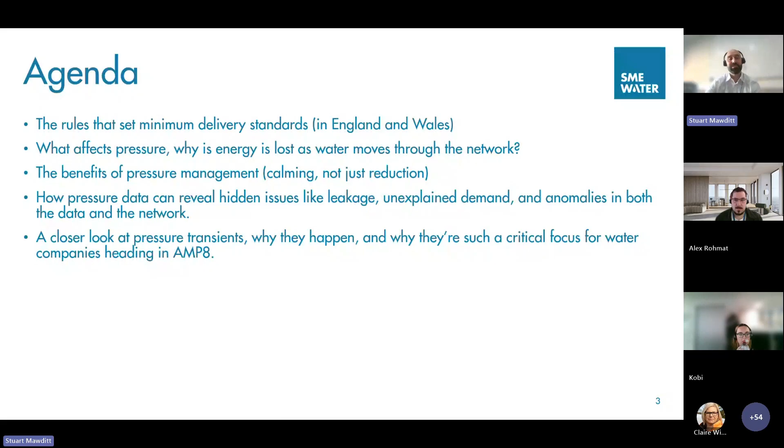I'm going to touch a little bit on how pressure data can reveal hidden issues like leakage, unexplained demand and anomalies in the data and network, and reflect on some work we've done in the past with Severn Trent, and something quite a few water companies do, using loggers throughout the network to look at things. I'll also touch on pressure transients, why they're such a critical thing to anticipate - it's an area that's increasingly important, and it's an area we as a business focus on more, and I know a lot of companies are looking at increasingly. So it's worth touching on and worth discussing.

So, starting off with what should we be doing as water companies and as an industry from a water pressure perspective? Ofwat have their guaranteed standard scheme, which sets out what water companies should do, and in that it says water companies must maintain a minimum pressure in the communication pipe of 7 meters static head. Part of the background behind that is the idea that that's the amount of pressure you would need to deliver water to a loft tank of a typical 2-story house.

There's no upper limit to this. Water companies can deliver as much pressure as they want to individual customers, but it's in the water company's interest to reduce pressure on the network, because reducing pressure will reduce the flow rate for leakage, and also is better for the pipe network, so reduces burst frequency. So water companies generally want to achieve as low pressure as possible, whilst maintaining what they need to from a customer perspective.

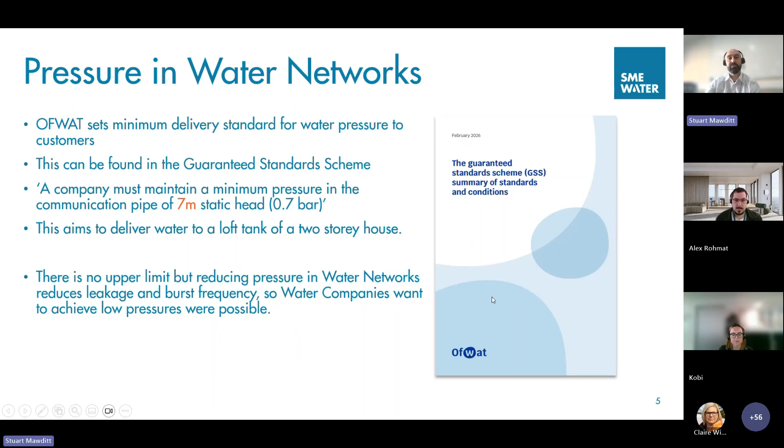Another consideration is long supply pipes and uphill supply pipes. A farm might be a good example. If you've got a valley and your water main is running through the middle of it, and then you've got long communication and supply pipes going off up the sides of the valley to farms, then giving a customer 7 meters at the end of their boundary might not be enough pressure to take that water up the hill to their farm.

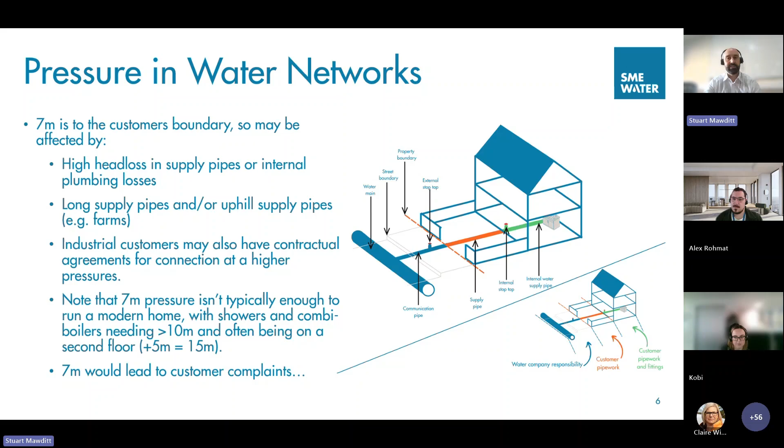So if as a water company you delivered 7 meters to a customer at their boundary, you'd probably get customer complaints because it wouldn't be enough to satisfy them. So water companies typically in the past have worked to a surrogate pressure of 15 meters in the water main. If we assume in this main pipe that's running through the network we've got 15 meters, that allows for any head loss on our communication pipe, guarantees 7 meters at the boundary, and also makes sure that customers are getting that extra bit they probably need.

Looking back at AMP6, we would often have seen companies targeting sort of 20 meters or 18 meters as their standard in the water main as a minimum. And that's because companies would have looked to have balanced low pressure targets as well as improving network performance.

Back in AMP6, companies had to report on where they weren't achieving that. As we've moved through changes to reporting and changes to targeting, that stopped being a standard measure for all water companies. Some water companies, as we move into AMP8, have still chosen that as one of their metrics, an optional metric that Ofwat can challenge them on. But quite a few water companies have dropped that, and it's no longer compliant, with a greater focus on CMEX, so customer satisfaction, rather than necessarily on individual pressures.

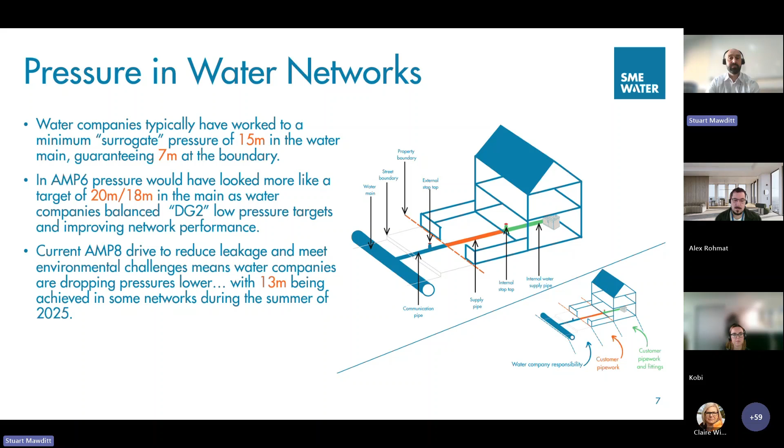Particularly over this past summer, we've seen water companies dropping pressures lower, down to 13 meters in some parts of the network. They haven't had a significant number of customer complaints, it seems to be working well, and we've seen those pressures sustained through the winter, starting to become a bit more of a norm. The key takeaway is that water companies are increasingly looking to find better margins of improvement, trying to get into areas we haven't been in before, and pressure's increasingly important for that.

Key numbers: 7 meters is the minimum pressure at the boundary, 15 meters in the water main is a common target, and below that there is a risk that customers might start to be affected, although water companies are pushing those boundaries a little bit.

Key considerations: water companies want to reduce pressure to deliver network improvements, particularly around areas like leakage, number of bursts on the water network, and interruptions to supply, which are all key metrics that are increasingly challenging through this AMP in terms of performance commitments. We're already starting to see water companies not necessarily meet all those performance commitments as they get harder through the year, and these benefits have to be balanced against CMEX.

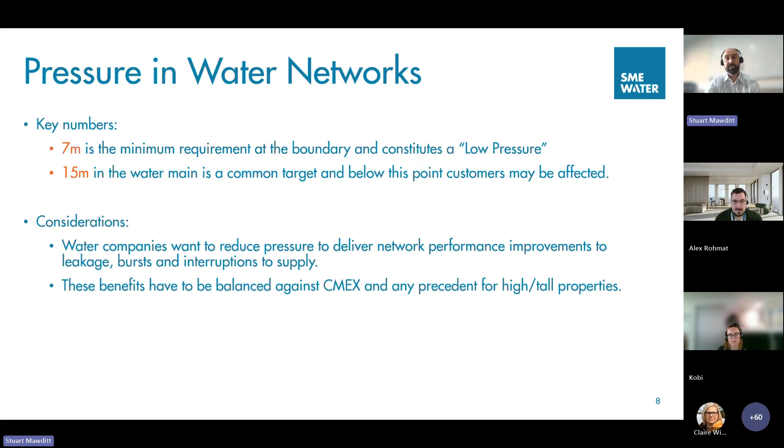Alongside these drives to improve operational performance, we've got to make sure customer satisfaction is high on the agenda, and also precedents that have been set around areas of the network we've delivered to, like high buildings we currently deliver water to, tall properties, tower blocks, etc. So there's a lot to balance across that.

What affects pressure on the water network? Water pressure typically occurs from two sources. The first and most obvious is that the source of water is at high level - we have lots of occasions in the UK where we have tanks on top of hills, supplying water down into the network, and that water carries the pressure with it. Or we might have pumps or booster stations at key points of the network putting more energy into the system for that water as it comes through.

As water moves through pipes, we lose energy through friction, particularly if we've got bends or partially open or closed valves - forcing its way through loses energy and pressure. Different pipe sizes and materials cause different energy loss. Generally larger pipes with a higher diameter and plastic pipes which are smoother cause less energy loss, whereas particularly smaller pipes and rougher pipes like older cast iron, which tends to have a rough inner surface, lose more energy as water tries to pass through.

The other key factor is that demand increase on a water network means we're pulling more water through the network, so we've got more friction on the inside, and we're losing more pressure - so pressure overall will go down. We often talk about, particularly in summer demand periods, struggling for pressure on the network.

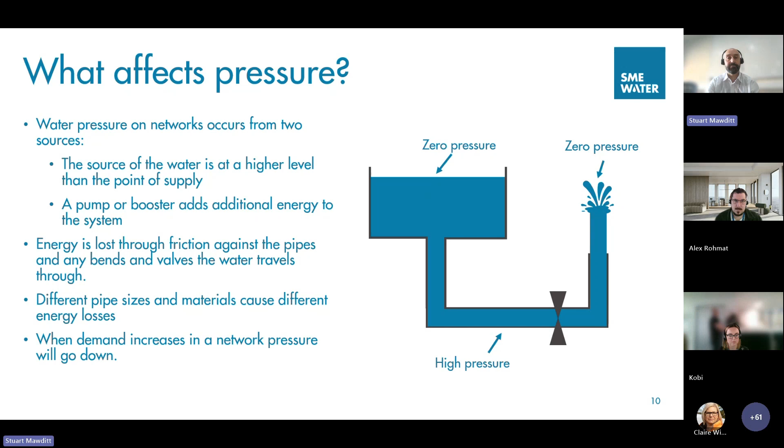A couple of key components in terms of understanding pressure: total head is effectively the weight of water acting above which creates pressure. If you imagine a lake, the total head is the elevation plus the pressure at a point in the system. We create 3 points on the network. At point A, the elevation is 100 meters, but there's no water pressure because we're on the surface of the lake - that gives us 0 water pressure and a total of 100 plus 0, which is 100.

As we go down below the surface, we start to get more pressure, but we've offset that with a reduction in elevation. At point B, an elevation of 75 meters gives a pressure of 25 meters. Then heading down towards the bottom of the lake, we've got 50 meters, which is the weight of the water above as pressure, at an elevation of 50 meters.

This is true for a static system. In the lake, we're not getting water moving through, so we can translate directly the elevation into pressure - a simplification. If we had a water pipe running down this hill, we can use exactly the same assumptions to calculate the pressure at any given point in the pipe, as long as the water isn't moving - as long as it's static, we haven't got any friction losses due to water moving through the pipes, or any other losses at all. We can assume the pressure is related to the elevation in the pipe.

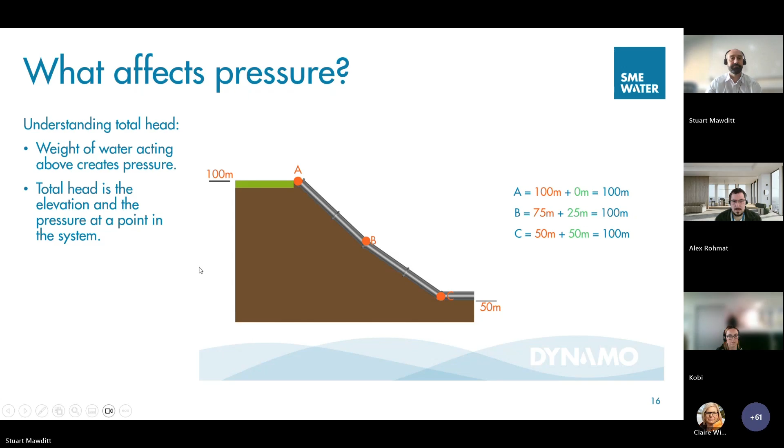Okay, so understanding head loss. The key component that causes head loss, the loss of total head in the network, is friction. As water moves through pipes, the water rubs up against the edge of the pipe, which creates friction and energy losses.

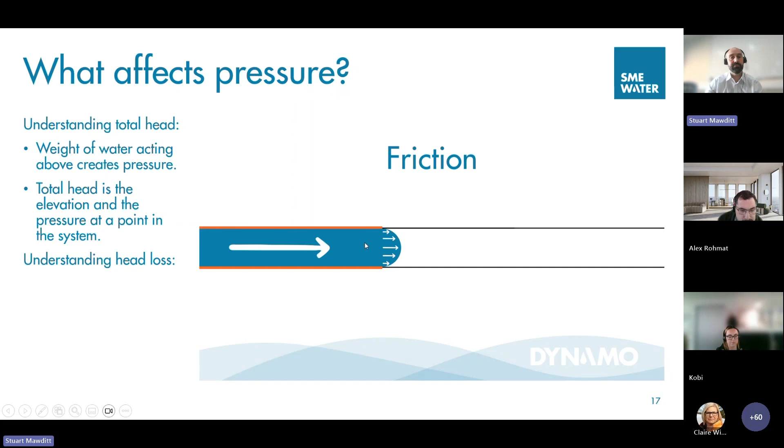One of the key equations we use to understand this is the Darcy-Weisbach equation, and breaking this down allows us to understand the key components that affect friction losses in pipes. The L on the top of that equation represents the pipe length. You can imagine if we're losing a bit of energy over a short pipe length, if we double the length of that pipe or triple it, we're going to lose twice as much energy, or 3 times as much.

Moving on through the equation, we divide it by the diameter. Narrower pipes will have more friction. If you imagine a small diameter pipe, the ratio of the surface area for water to flow through, related to the surface area touching the outside of the pipe, is quite small. As we increase that, we get a much bigger ratio in terms of the volume of water that can pass through without touching the edge. So the relationship of those friction losses drops. Bigger pipes, less friction losses; smaller pipes, bigger friction losses.

Faster flows cause a big increase. Obviously if the water's moving faster through that pipe, we get much higher friction losses. And that's a square relationship - that means as we increase the flow through a pipe, represented by the velocity there, we see a square relationship. So putting twice as much water through a pipe will create 4 times the amount of head loss, with 4 times being the square of 2, as we're trying to force more through.

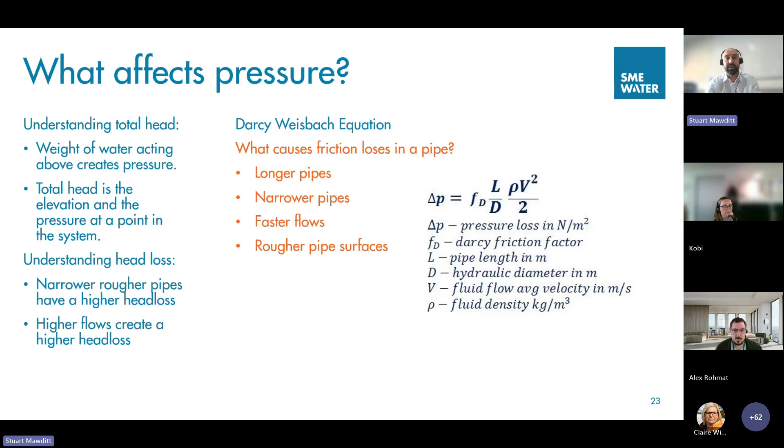So those things all contribute to us getting a higher head loss in a pipe. One of the key takeaways when looking at water networks is that bigger plastic pipes have fairly negligible levels of friction losses compared to older cast iron networks. So narrower, rougher pipes have a higher head loss, and higher flows create a higher head loss.

The other area is looking at turbulence in pipes. On the left-hand side, we've got what we'd call laminar flow within a pipe, where water moves in nice smooth layers and isn't interacting with itself. As we come across parts in the pipe causing restrictions, the water has to go through that restriction, which causes friction losses, but it can also create turbulence within the network, meaning we lose energy as the water effectively bumps into itself as it moves around.

That turbulence can be caused by corners in the network, where the pipework is going around a bend or a corner, or where we've got other tighter bends in the network, or where we've got partially open or closed valves, etc. within the network. That can have quite a significant impact.

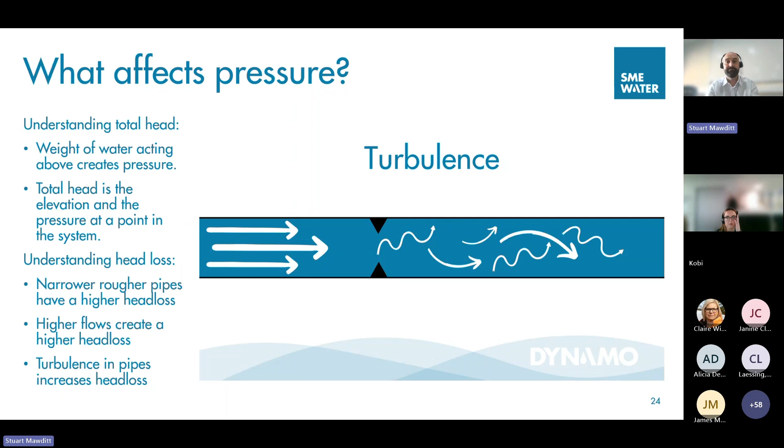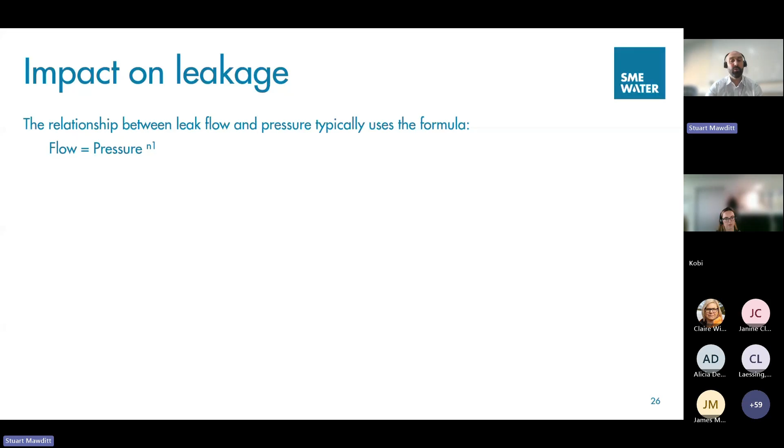Moving on to talk about benefits of pressure management, on time. The relationship between leak flow and pressure typically uses the formula flow equals pressure to the power N1. So as we increase pressure in the network, the flow coming out of leaks will increase, and we use an N1 relationship. I'll talk a bit more about that N1 relationship.

And that N1 relationship depends on a number of factors. What I'm talking about here is a burst on a pipe, and that burst can have a number of different failures.

It could be circumferential, it could be longitudinal, it could be corrosion, so it could be a hole in a cast iron pipe, it could be a joint, and with those joints they might open up as we increase the pressure. So depending on the type of failure, it can affect the relationship between flow and pressure.

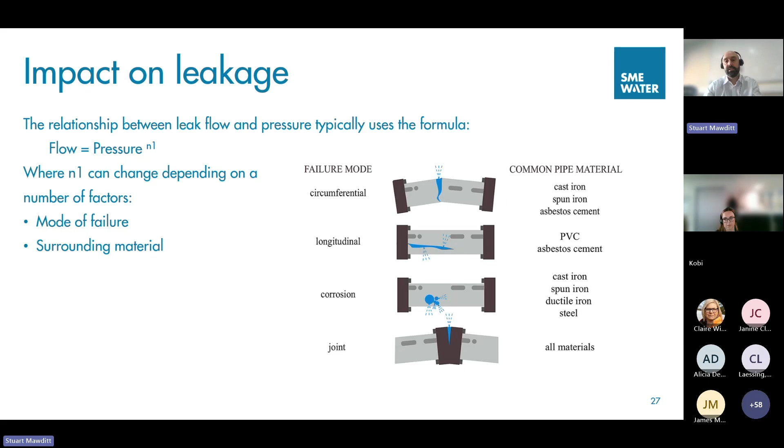We've also got the surrounding material to consider. Where we've got the burst on the network, it can start to erode the surrounding material around the pipe, and that might cause the pipe to fail more and open up more. It might also mean that it's not then restricting flow that's coming out of the pipe.

N1 uses a fixed orifice equation. In this example, we're saying that there's a hole in the pipe and that pipe doesn't change. This is an experiment I remember doing as an undergraduate at university. The idea is that you fill a reservoir with water, you've got several holes, and these are all fixed orifice holes, so the size of the hole doesn't change as you do the experiment.

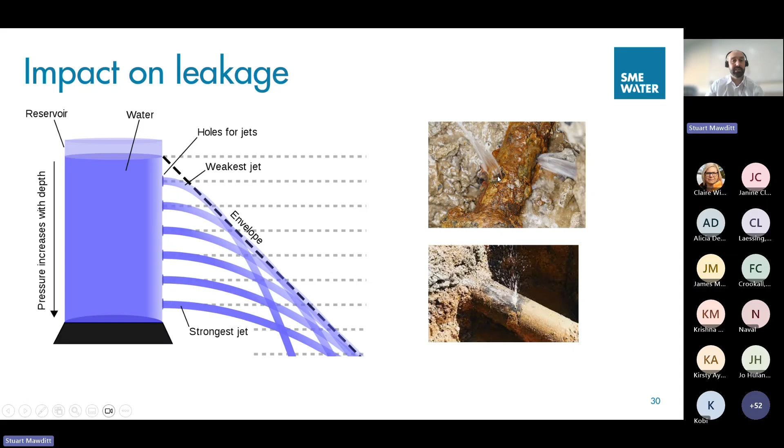This relationship is proportionate to the pressure to the power 0.5, so we're getting diminishing returns in terms of the pressure for the length of the jet. This is consistent with cast iron failure, where we get a hole appearing in the cast iron. You can see in these cases there's a hole, and that hole doesn't change in size depending on what you're doing. So a cast iron spot failure typically follows this line, and we're not seeing a proportional representation in terms of the change of pressure and flow.

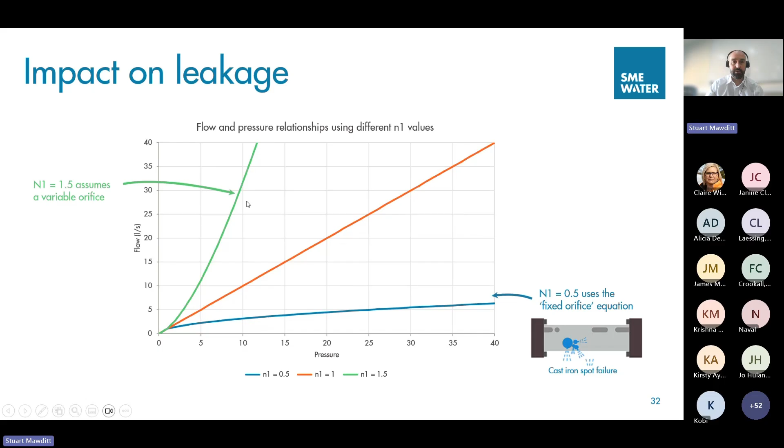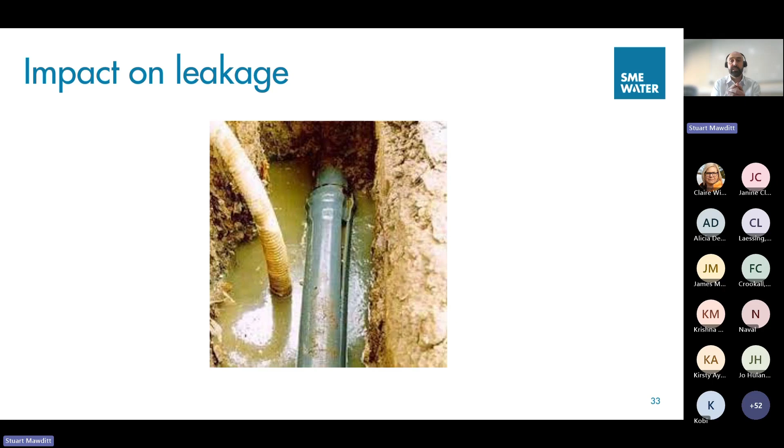An N1 of 1.5 assumes a variable orifice, so this is the opposite. You can see a plastic split in a pipe that's been excavated. Now you can imagine that split opens up, and as the pressure increases in the pipe, that split probably opens up a little bit more and a little bit more, which allows more water to escape. So that's giving us a variable relationship. A good example of that would be a plastic longitudinal failure.

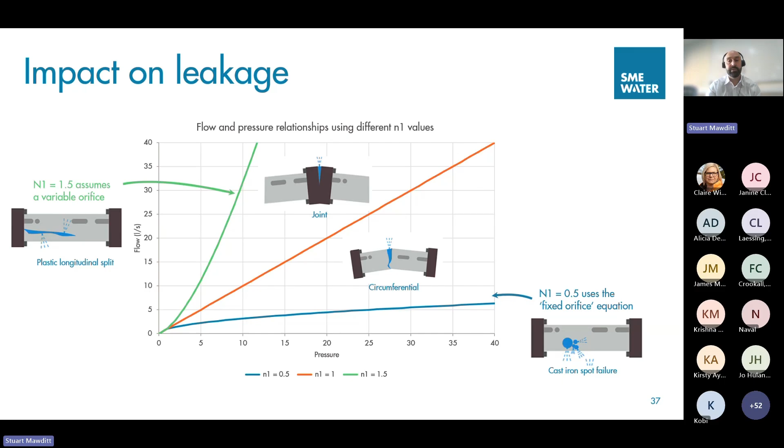Now there are other types of pipe failure that sit in between, so there might be joint failures or circumferential failures, which are maybe allowed to open up a little bit, but are then more restricted. What we often find is that on water networks, we get a mix of relationships depending on the type of network. We might have a network that's predominantly cast iron, or predominantly plastic. But these relationships allow us to calculate the benefit that we would get from reducing pressure on a network.

What we often do is try and split bursts down - this is getting a bit complicated - into non-pressure dependent bursts and pressure dependent bursts. So the idea is that we've got a block of bursts at the bottom of the graph, where we're saying regardless of what we do with pressure, that pipe's always going to fail to some extent.

And that might be because of ground movement. Particularly, we've seen a lot in the past 5 years of very dry summers, so we might see ground shrinking. We then get very wet winters, so we're seeing ground expanding. Depending on the soil type, you're then seeing different types of relationships in pipes. So we often talk about a non-pressure dependent component that sits at the bottom of the graph, and then we've got this power law that gives us this relationship, typically using a value of 3 to represent that power law.

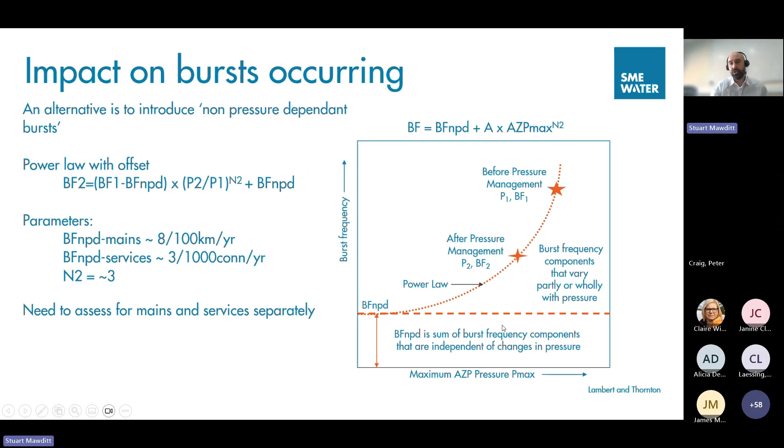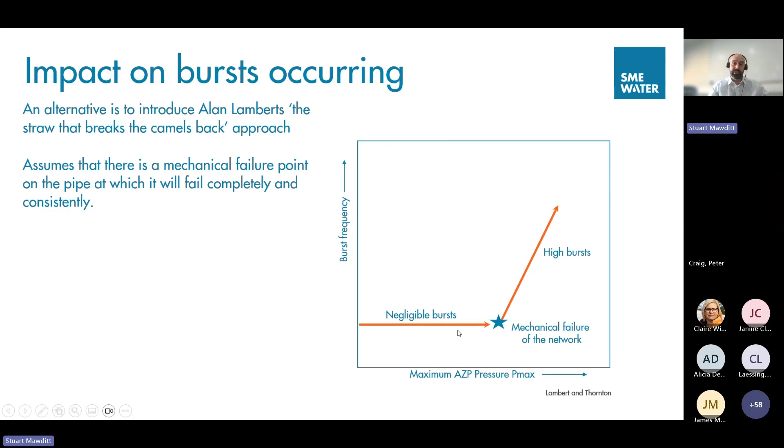This assumes that there's a mechanical failure point in the network. We've got a curve here that shows a cube relationship, but you could also say there's just a point at which it fails. So there's a point at which you get negligible bursts, representative of non-pressure dependent behavior, and then you get failure.

There are lots of things that affect the network once it's been laid - things like soil corrosion of the pipes, so cast iron pipes laid in clay will often corrode quite viciously. You get traffic loading on networks, so if pipes are laid under roads there's movement. You might also have pressure transients happening on the network, from customers operating and closing valves, or water network pumps damaging the network as they pass through.

These external factors bring the actual strength of the pipe down to a certain point. If we can bring the pressure down below that point on the network, we're achieving a level below where mechanical failure occurs. So there's a suggestion that rather than continuing to get benefits from pressure reduction, we actually reach a point of diminishing returns.

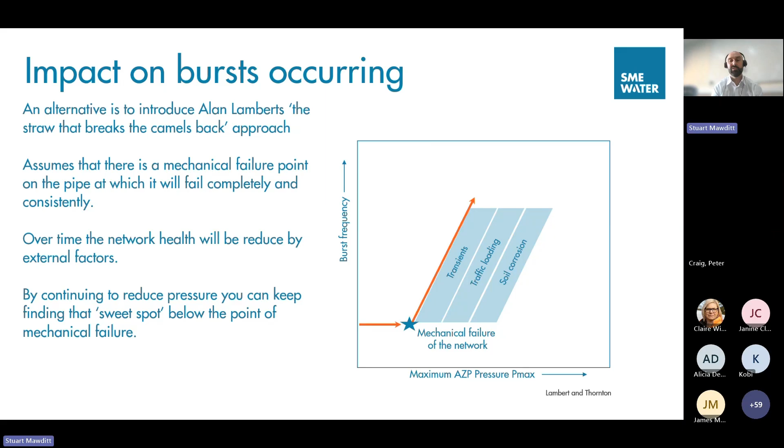That's quite interesting when we start talking about those lower ends of the pressure scale. So once we're below 20 meters and water companies are trying to balance that, do we keep reducing pressure? Where can we see benefits compared to making sure we're getting good customer satisfaction levels and not impacting on customers' homes?

One of the other things talked about in the industry is understanding whether networks, once you've reduced the pressure, relax and become accustomed to that pressure - a lot of people talk about the idea that over time, the level of bursts builds back up.

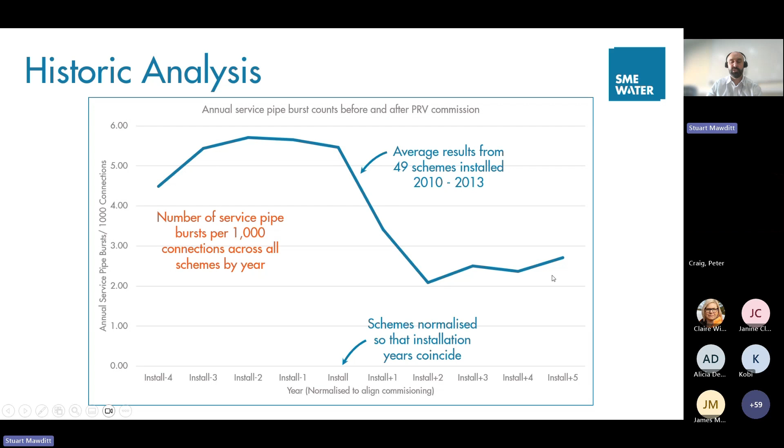So here are some examples of pressure reducing valves that were installed and commissioned - about 49 schemes installed between 2010 and 2013. Normalizing that, you can see a significant impact. This is looking at annual service pipe bursts per 1,000 connections in those areas. You can see you're typically getting 5 service pipe bursts per 1,000 connections in the years before, dropping down to around 2.5 - so you're halving the number of service pipe bursts happening on the network.

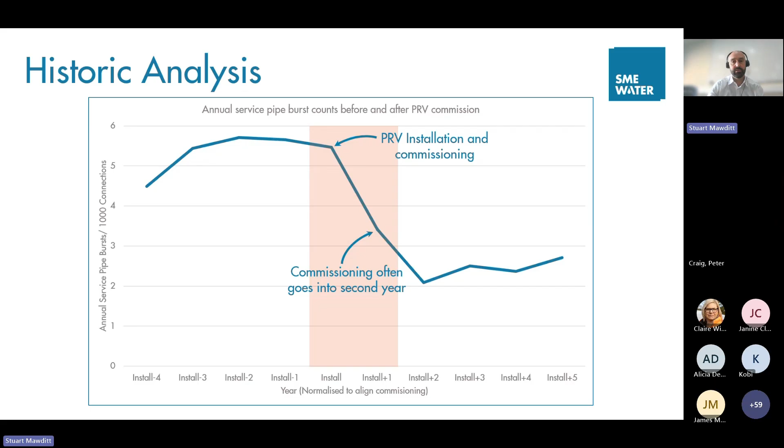So that's looking at PRV installation. Commissioning might come into the second year, so it might take a couple of years to get the system working effectively - 5.3 bursts before, and then 2.5 bursts afterwards.

Just looking at the 2010 schemes, we did a bit of analysis over the next 7 years, and you can see in that example you've got a sustained burst reduction benefit. From the analysis we've done, we haven't seen the network start to creep up to previous burst levels if that pressure is sustained - but there are certainly other people in the industry who think it does. So there might be questions around what benefits you're going to get from pressure reduction and whether that's sustained over a longer period.

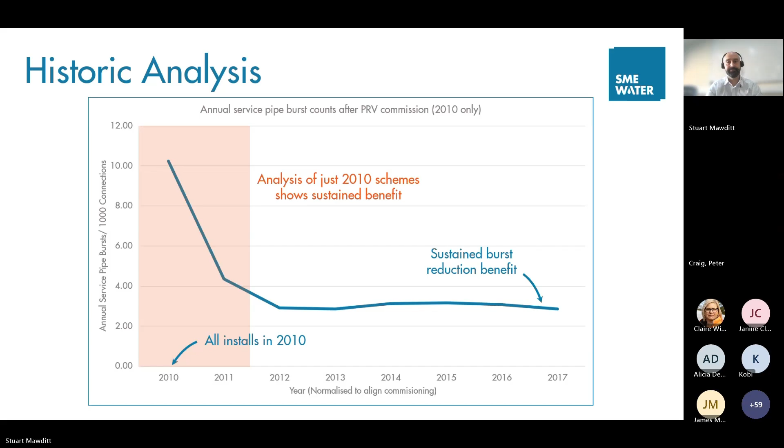Okay, going on to talk a little bit about using pressure data within water networks - how do we identify opportunities to optimize pressure on our networks? I'm going to talk about installing pressure reducing valves and how that allows us to reduce pressure, and property pressure analysis, which is one of the tools we use as part of that. I'll also talk about dynamic pressure modeling, which is effectively using pressure sensors on the water network and looking at the relationships between them to understand what's happening.

Pressure reducing valves allow water companies to manage the pressure on their networks. If we've got an area that's high pressure, we can put a valve on the network, and a pressure reducing valve can either give us a nice steady sustained pressure on the outlet, so we drop by a fixed amount and sustain the level, or we can do complex controls, so at night time we reduce the pressure further, but in the daytime when people start taking water from the network and need more pressure, we increase it as the flow increases.

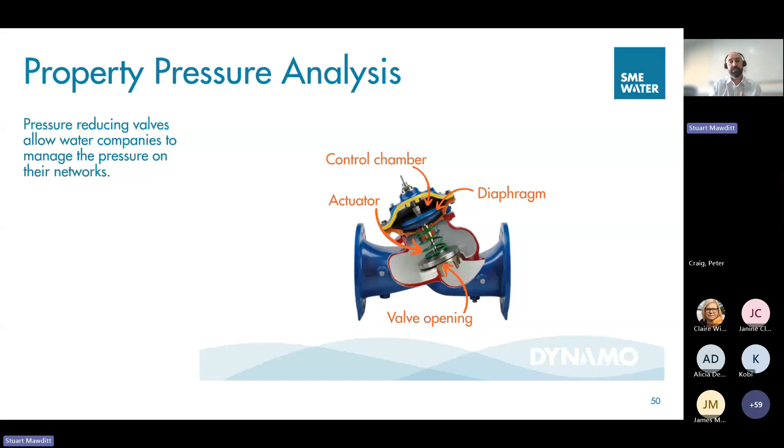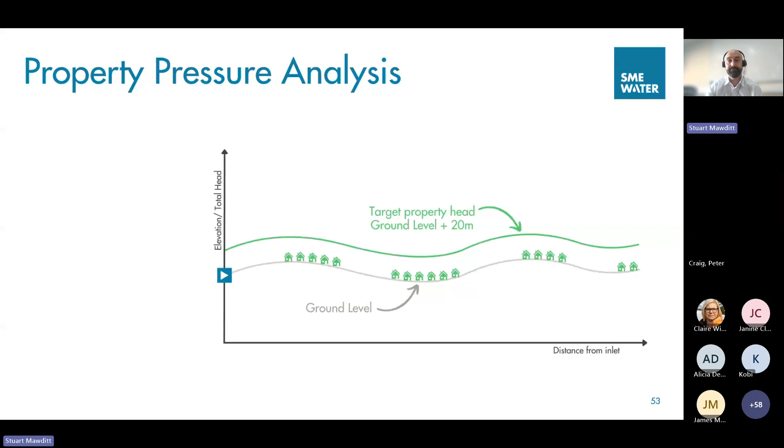We talked earlier about our total head. We've got our total head line, which represents the pressure plus the elevation in that DMA, and we can see that's decreasing as we go through the area. So as we're moving through the water network, we're losing energy and losing that total head.

We can then simulate the impact of installing a PRV. We've dropped the pressure down, put a valve on the network, and that effectively just drops it down as a straight line. So we've got a parallel line which shows the reduced pressure going there.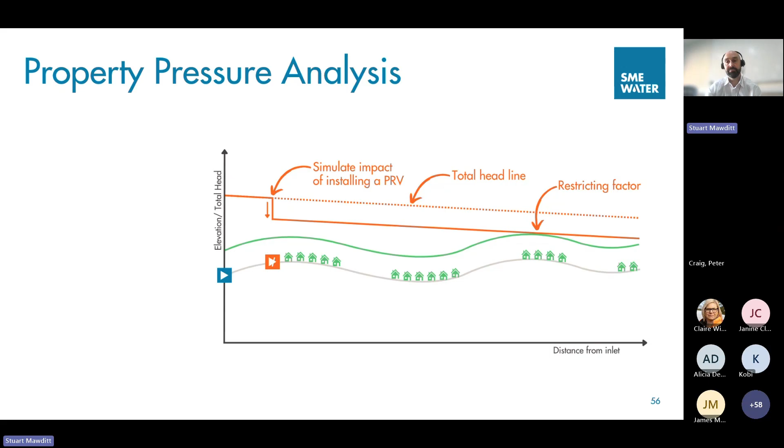That then comes down to a point in the network which is our restricting factor. In most domestic water networks, we'll have a restricting factor, which is the high point in the area where we've got very high head losses. So where that line's really steep, it might be a far point in the network, but we can pick up where we've got those restrictions.

What we can also consider is different scenarios. So in this case, that might be our peak flow, representing the amount of head loss we're getting in the network on a morning when everyone's up, having their showers, getting ready for work.

We might have a minimum flow scenario. We talked earlier about the head losses in the network and identified that at lower flows, we're seeing less head loss, so you can see that's a much shallower profile.

Adding that modulation, which allows the PRV to change its outlet pressure at different times of the day, then we can achieve a reduction at minimum flow.

When we look at that from an overall benefit, you can see we've got optimization at that point. It comes from a reduction, which from the formulas we looked at earlier, means we get a reduction in pressure, a reduction in flow and leaks, and a reduction in burst rates as well.

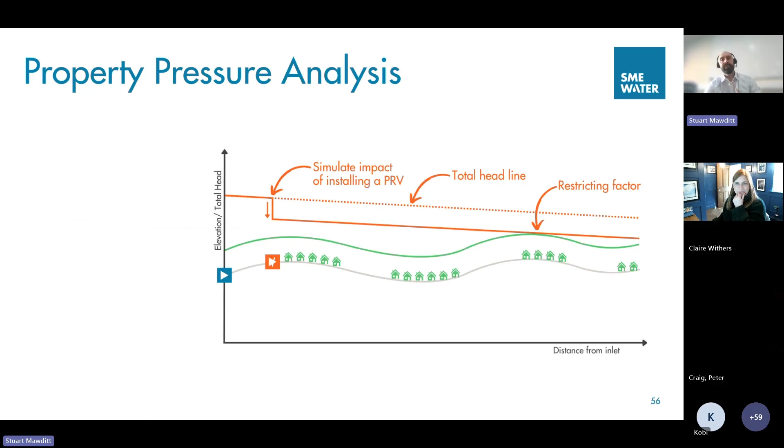So we simulate the impact of installing the PRV. That's a minimum flow scenario, so we've got less flow on the network, so we've got less head loss, so we've got a slightly shallower line in terms of what's happening.

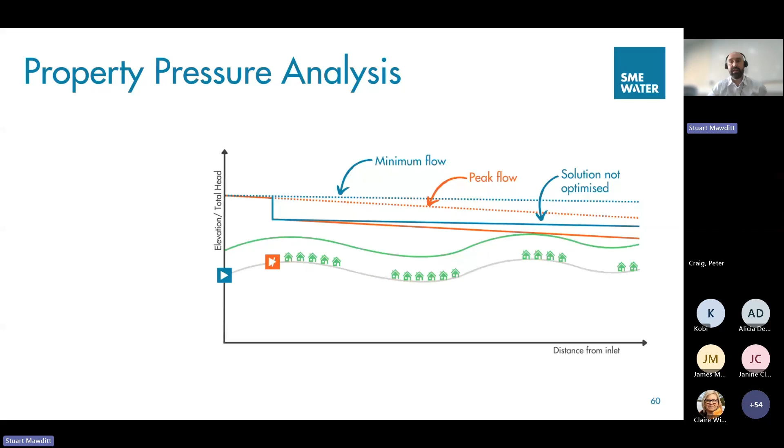When we take that from our PRV, we can show that at night time we'd have excess pressure. So those properties, where it might be optimized during the day, it's not as optimized at night. Now the control we have on pressure reducing valves allows us to modulate that valve and give greater reduction at minimum flow, so we can squeeze the pressure down a bit more at night time.

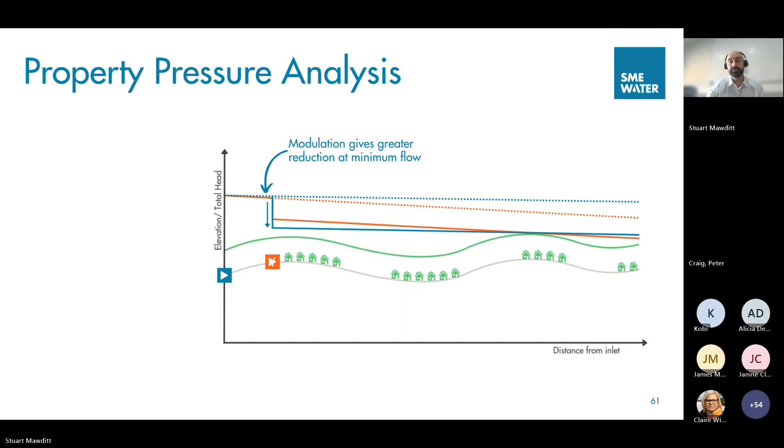Let me just stop sharing for a second. I shall just try plugging into a different network and see whether that improves. My camera might go a bit odd, you might see me on our meeting room screen for a second, but I'll switch back. Is that any better? Let's go with that, and then I'll do a hand signal on the screen if it cuts out. I might not see you if I'm sharing, but we shall persevere. Thank you. I shall just have to reshare, 2 seconds. Sorry, my computer's just still reacting to me plugging in.

Okay, right, I shall persevere. Apologies if it's breaking down a little bit. Right, so we've got another sort of 5-10 minutes left. Right, so I'll move on from this bit.

The key takeaway is that we're getting network calming, so reduced pressure. There was a bit of an anecdote that I don't know whether you caught, that customers tend to prefer calmer pressure. A lot of customer complaints normally stem from variations rather than sustained low levels of pressure. So if you can get customers to a good level of pressure and keep it at that point, they tend to be happier overall.

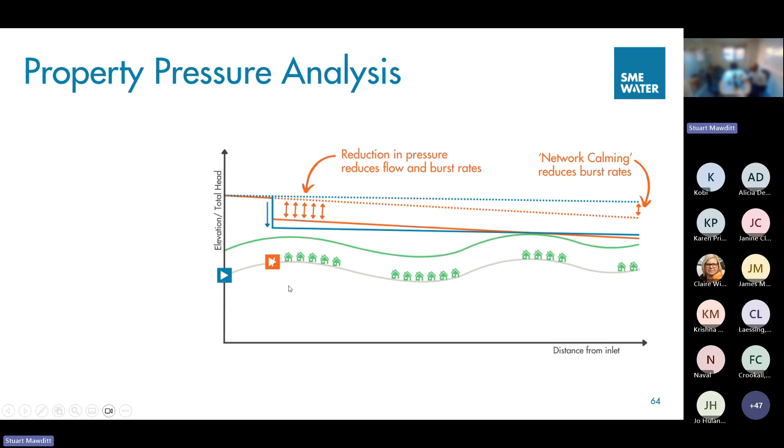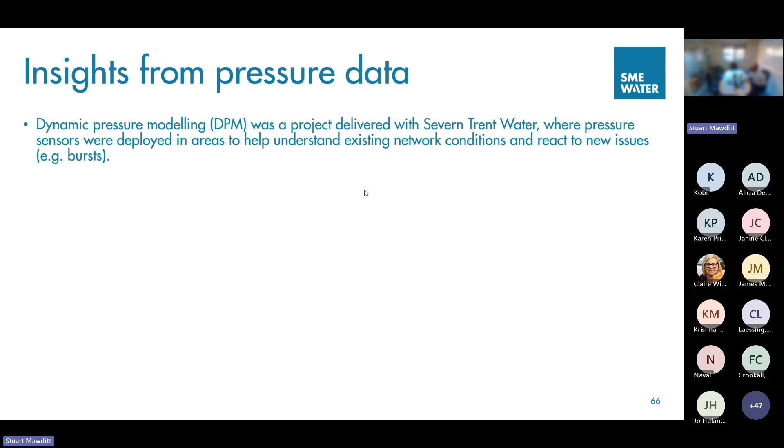Okay, so moving on to some additional insights. I'm going to talk about a project called Dynamic Pressure Modeling we did with Severn Trent, where pressure sensors are deployed in areas to help understand existing network conditions and react to bursts on the network.

So in this case, we've got a district metered area. District metered areas are used by water companies on their clean water network to create a subsection of the area. What we typically do is monitor the flow going into an area, close all the valves around the outside, and that allows us to understand what's going in. We can subtract how much demand is being used by customers, etc., and that allows us to say whatever's left, in theory, should be leakage. If that changes, we know we've got bursts on the network and can respond to it, with a fixed area that we're responding to.

And that works because of the head loss on the network. So when a burst occurs, that increases the flow. We then see an increase in friction losses through the pipes, so we see a drop in pressure in that area predominantly compared to the others. So we're able to pick that up.

This is something that is increasingly being used by water companies. We see some companies, Anglian Water, Affinity, have installed increasing numbers of pressure loggers on their water networks. Some people are doing more complicated things around hydraulic modeling, actually building detailed models that simulate the head loss in the network more effectively. Other companies are doing simpler things, just looking at the difference in pressure without getting into too much hydraulic detail. So it's quite useful.

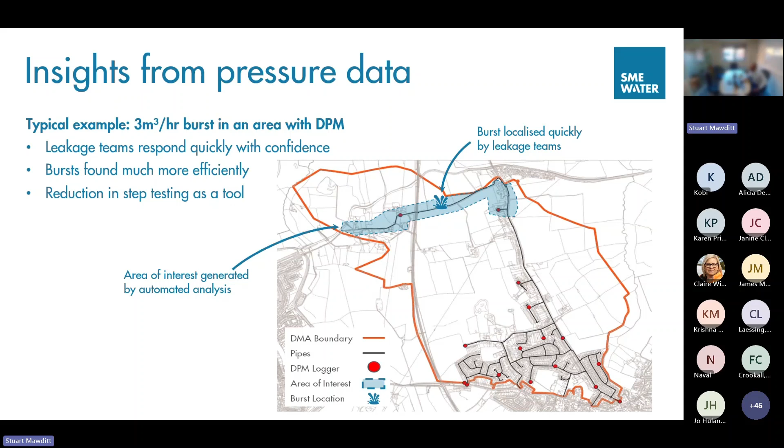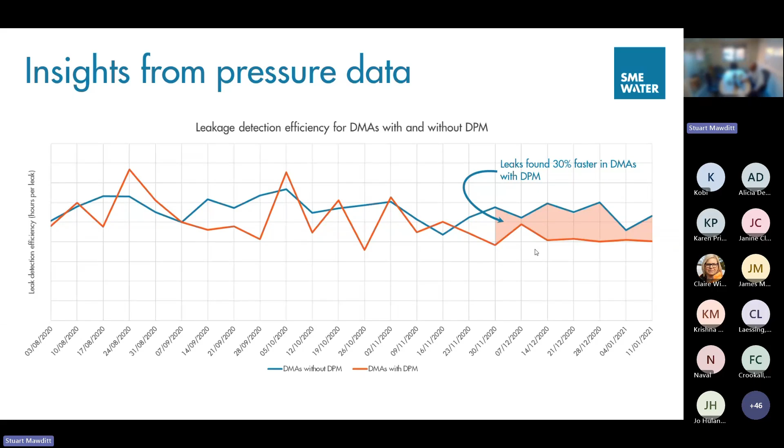This is showing some of the results from Severn Trent, and they found that leaks were found 30% faster in areas with dynamic pressure modelling, so quite a good result. Looking at leak detection efficiency over a longer period of time, 50% more leaks were found in DMAs with that solution in place than areas without.

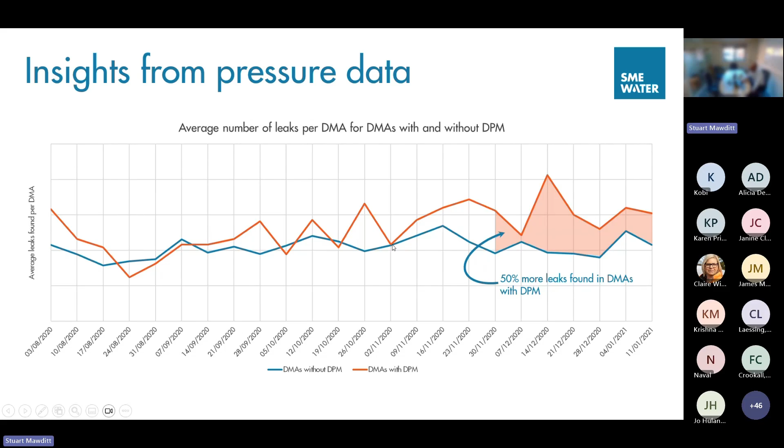So it can be quite effective, but it needs to be deployed in the right area. It's not formed part of Severn Trent's long-standing process. I think with all solutions, you've got to look at the overall cost benefit and the challenges of deploying pressure loggers on the network, maintaining them long-term means that there might be more cost-effective solutions out there.

It can be quite effective for doing things that are non-leakage, particularly identifying where you've got boundary valves open with adjacent areas. Pressure can tell you where you've got inline valves, so you've got part where you've got valves in the network which are closed, causing restrictions. It might also highlight where you've got problems with your GIS.

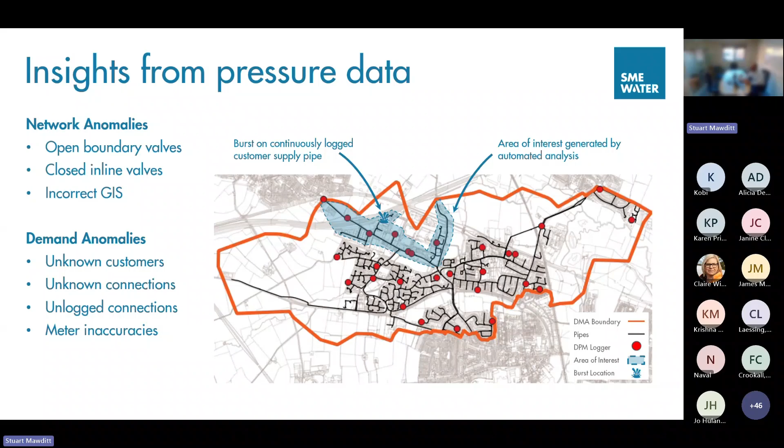It's quite good for identifying demand anomalies, picking up where you've got unknown customers on your network or unknown connections, because it's effectively telling you what's happening, which you'd be limited from if you were just surveying your known network.

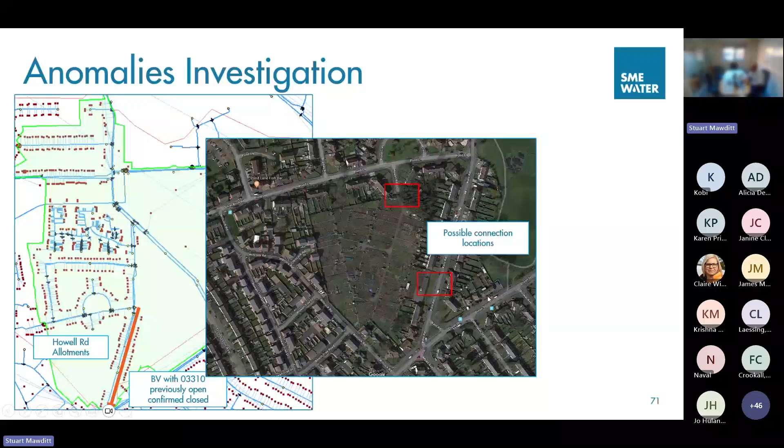A good example of this is the analysis picked up a kind of leg down in this DMA, an area fed from the top. You've got allotments down here, and a valve that was previously open that had then been confirmed closed at the top. Looking at these allotments, you've got possible connection locations coming in. A survey found that actually there was a meter that had been installed feeding the allotments from a different set that hadn't made it through into the GIS and the analysis. So there was additional demand in the area.

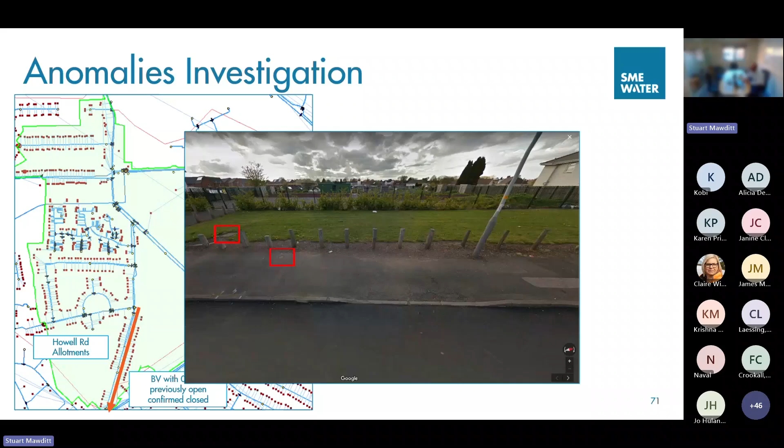If you were looking for that as leakage, you wouldn't necessarily survey that and think there's anything wrong here. But by doing that balance of where should the water be going and where is the water going, you get a different picture.

So how do I identify opportunities? Looking at installing PRVs is quite effective. Dynamic pressure modeling can be effective for understanding anomalies, but it only works where there's high head losses, so smaller diameter cast iron networks.

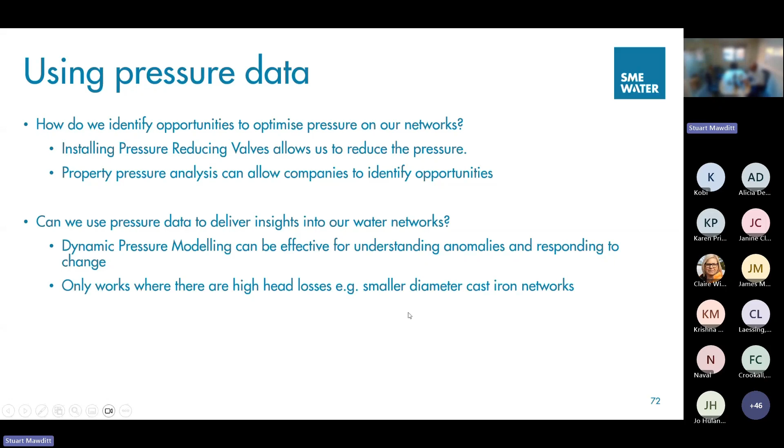Just talking a little bit about pressure transients, also known as water hammer, which generally occur where a column of water suddenly stops. Typically, if we've got a volume of water in a pipe moving through, and we close something like a valve very quickly, you can imagine the weight of that water comes crashing into the valve, and the energy then bounces back through the network. So there's a shock to the network which can cause damage to assets.

This typically occurs on water company assets, for example pumping stations, or might be PRVs that are opening or closing too quickly. It could be network operations.

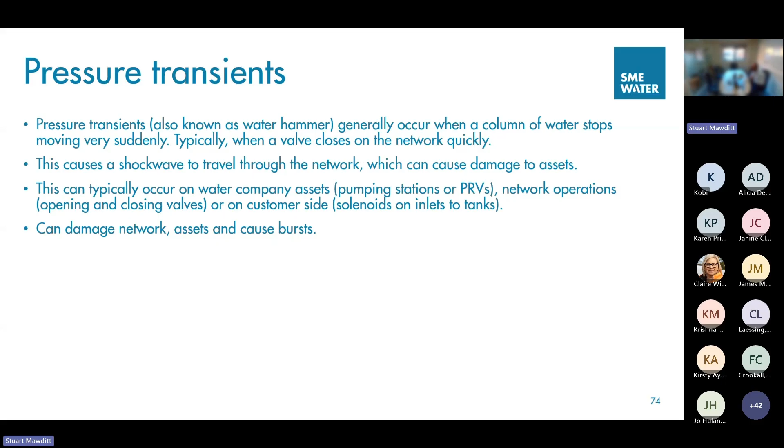A typical customer example would be if a customer's got a tank as part of their operations, with a solenoid valve on the inlet controlled by level. They open that up, the tank's filling at a very fast rate, it hits a point, and that tells the valve to close. The valve closes instantly, sending that shockwave back up the network, which can cause instantaneous bursts and damage network assets, including around PRVs and other network control assets.

In AMP6, we saw an increased development of higher quality logging equipment. Previously, historically, we've seen water companies either taking spot readings of pressure or monitoring the average over a 15-minute period. But we increasingly see transient loggers emerging in AMP6 with logging typically of 100 hertz, so that's 100 times per second, used to pick up transient waves.

That really is an effect of, I think, technology prices reducing, and that technology being much more widely available for the water companies to deploy, with battery technology as lift-and-shift loggers and permanent logging on the network.

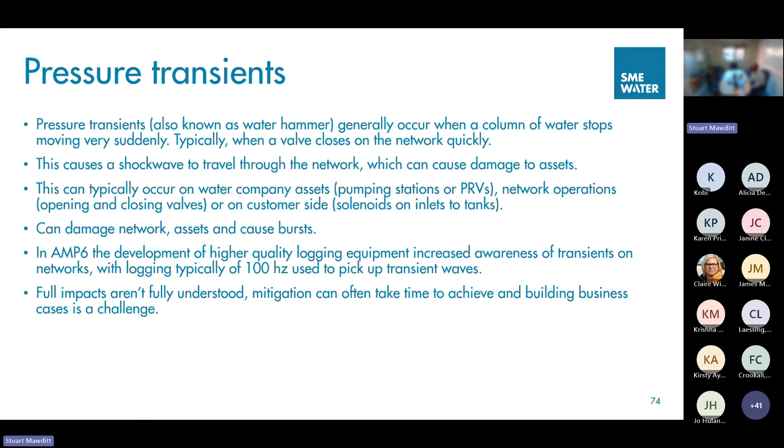Full impacts of transients aren't really fully understood, and that can make it quite hard for companies to build business cases to say, I can see there's transients happening on the network, but how do we understand the benefit of resolving them? Particularly where we've got pumping stations, those impacts can be quite significant.

One of the things emerging with this AMP is this move from 15-minute as standard across network assets to moving to 1 minute data with minimum and maximums. So typically we might sample at a second interval, then summarize that data to say what's the average over that minute, and what's the minimum and maximum. Using that data rather than the more detailed transient data is more cost effective for logging, and more cost effective for us to share that data as water companies.

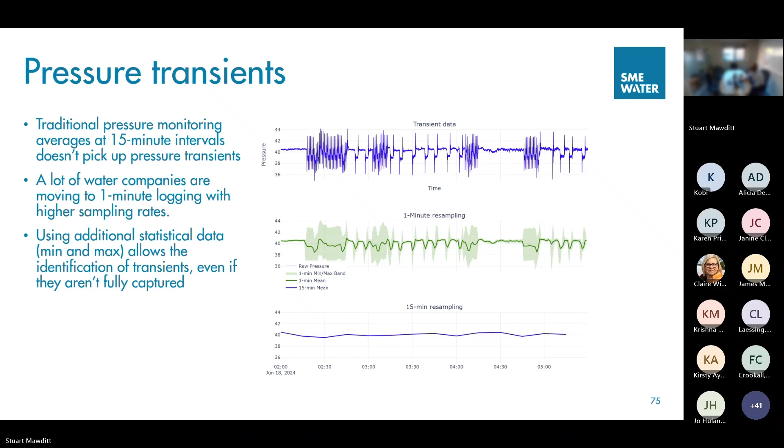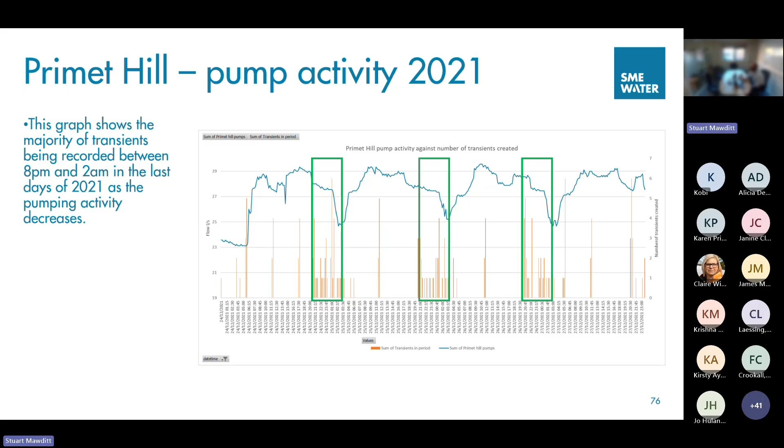So an example there of a pump, you can see on the graph you've got the flow through the pump, and the pumps are turning on and off. You've got lots of transient activity around particular times when the pumps are coming in and out, turning off. This is an example where the pump operations were changed going into 2022, and you can see there's a significant reduction in transients in that period, the number of transient events happening. You've still got more significant events still happening, so there's still more work to be done on those pumps, and often it's those big shut-offs and starts.

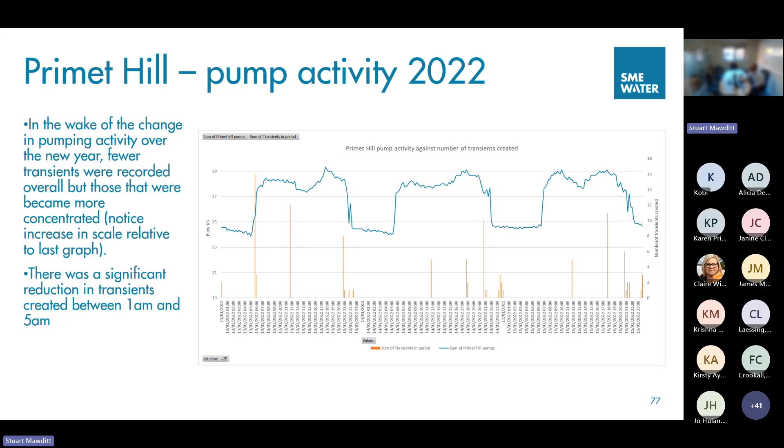Last bit, why are transients so important for water companies in AMP8? Interruption to supply is a key challenge for many water companies as targets get tighter, and interruptions to supply are measured in terms of property minutes. So if we have a big event on the network that takes a lot of properties offline for a large period of time, that can be an entire water company's interruption supply for the year, or that one event can mean they've missed their target completely. So the large-scale failure of bigger assets is under increasing scrutiny as we move forward over the next couple of years, so more costly interventions to maybe improve pumping on the network are starting to get a bit more palatable from an expense perspective.

Burst and leakage targets mean water companies need to start tackling some of the less cost-effective options they have available to improve performance. So rather than necessarily looking at how do we find leaks and mend them more effectively, we maybe need to look at how do we prevent bursts happening in the first place, and that might mean challenging customer side usage and some of their own assets. And then we're also seeing logging technology is increasingly more cost effective, allowing continuous monitoring and understanding of what's going on in the network.

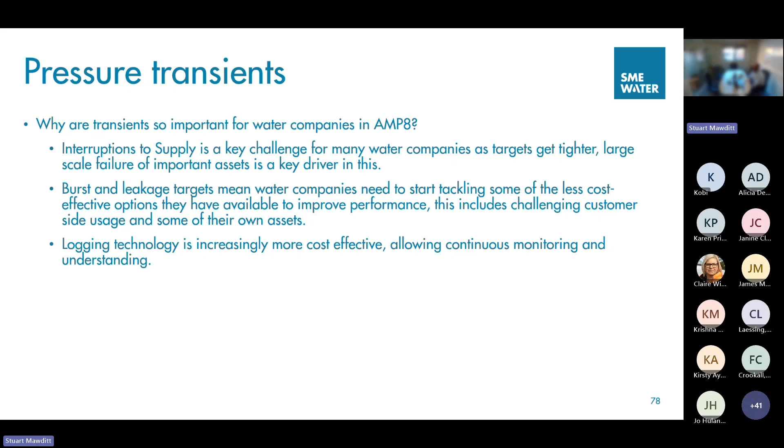How are we doing, Claire? Did the sound pick up? Yes, it was a bit better. It was just the odd word that we kept missing, and I was conscious that when we were getting into the detail, they're the bits we probably want to capture. But Joshua's given us a question, so thank you, Joshua.

Do you think that there is rationale or evidence to say that due to pressure management, we're making it far more difficult to find leaks?

Hi, Josh. Josh is an expert in this field. Well, I think he should be telling us the answer himself.

I don't know. One of the arguments for this would be that if we're reducing pressure on the network, we're making leaks quieter and harder to hear. But there's no evidence I've seen that suggests that, whilst reducing pressure makes leaks quieter, it's the loud leaks that are the bigger ones. So often the smaller, quieter leaks can be large leaks that are difficult to find anyway. I think we're seeing big improvements in terms of the acoustic technology available, a lot of AI and improved analysis of acoustic data and improved listening. So whilst traditional listening stick approaches might be harder, I think there are solutions out there that can listen more effectively to what's happening on the network.